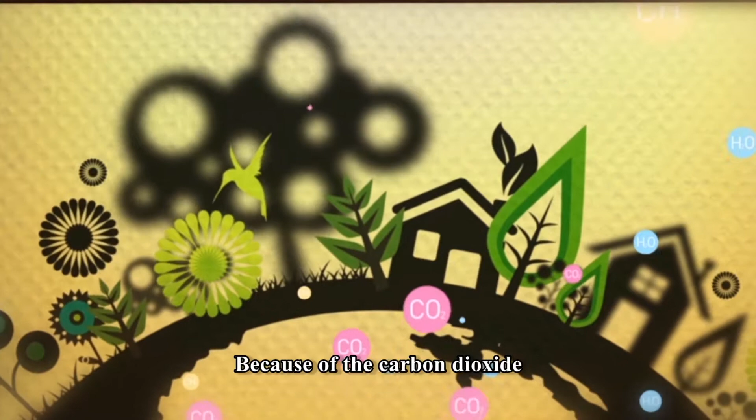This is because of the carbon dioxide and other greenhouse gases in the atmosphere. It's like the glass covering a greenhouse, which maintains the temperature and causes the greenhouse effect.

However, industrial activities consume extensive fossil fuels such as oil, coal and natural gas, resulting in excessive carbon dioxide. With excessive greenhouse gases, the greenhouse effect becomes too strong, causing global warming.

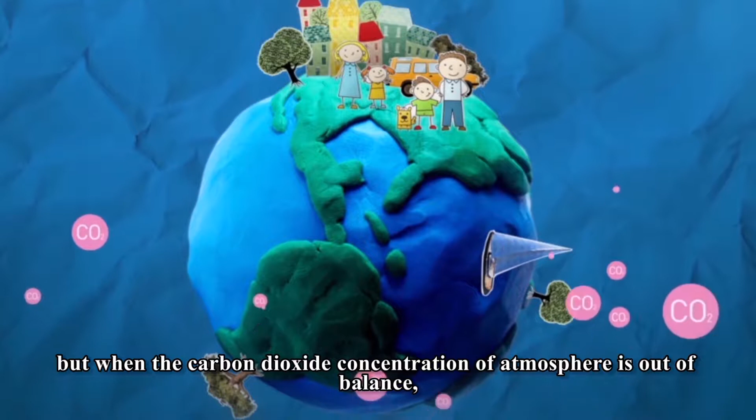Earth requires moderate amounts of carbon dioxide. But when the carbon dioxide concentration in the atmosphere is out of balance, it threatens the natural circulation of the Earth. Promoting comprehensive energy-saving measures to reduce carbon dioxide is the top priority.

There is a high-profile way to reduce carbon, which is carbon capture, storage and utilization, referred to as CCSU. There are many research teams devoting themselves to research and development on CCSU technology in Taiwan.

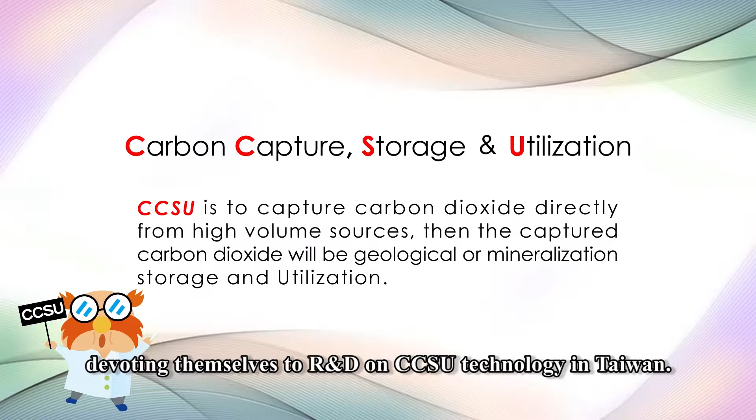The topic of post-combustion carbon capture is researched by Professor Zhang's team. They built a pilot plant in the Mailiao area of Formosa Petrochemical Corporation.

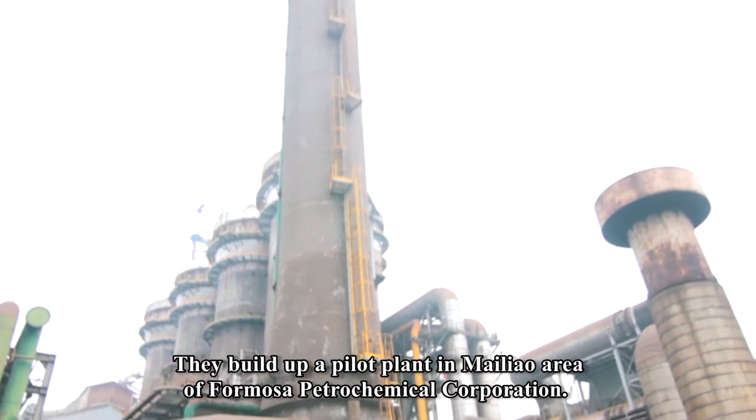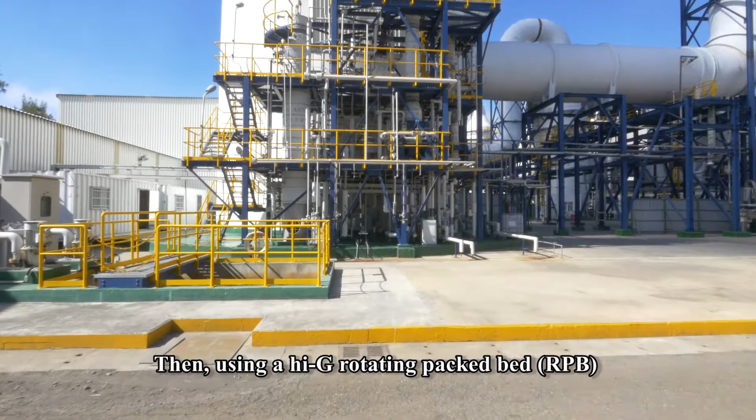First, the chemical absorption method absorbs carbon dioxide through a liquid absorbent. Then, using a hi-G rotating packed bed (RPB) can reduce two-thirds of the volume of the traditional carbon dioxide absorption tower, while also enhancing gas treating capacity.

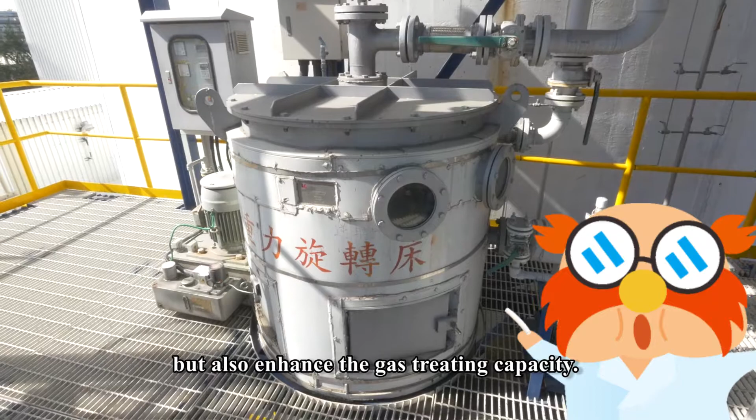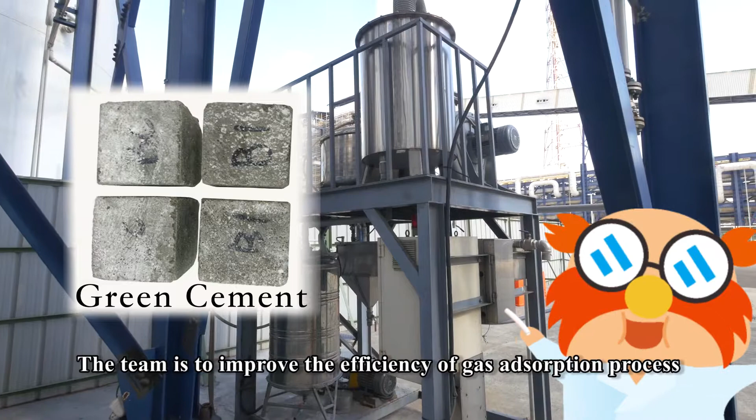The chemical absorption method uses alkaline waste as an adsorbent to adsorb carbon dioxide. The team aims to improve the efficiency of the gas adsorption process with a supergravity carbonation process, and the resulting carbonated converter slag can be made into green cement.

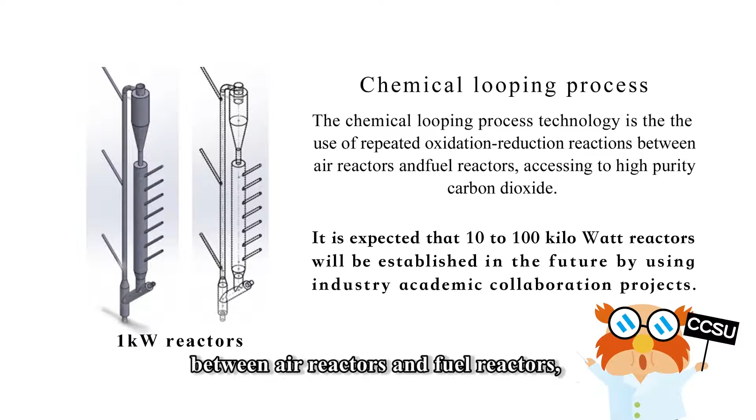The chemical looping process technology uses repeated oxidation-reduction reactions between air reactors and fuel reactors, accessing high purity carbon dioxide.

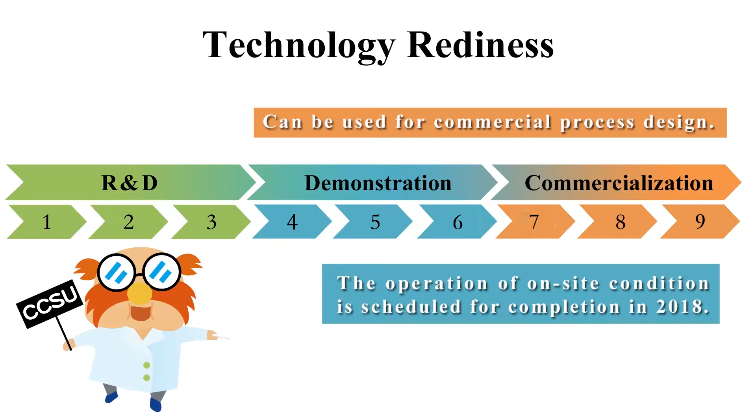The topic of pre-combustion carbon capture is researched by Professor Xiao's team.

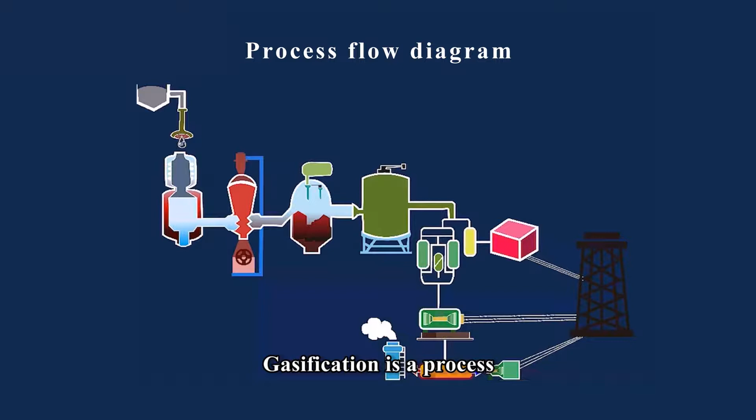Gasification is a process that converts coal or biomass materials into carbon monoxide and hydrogen-based syngas, and then a gas purification unit is used to separate the carbon dioxide.

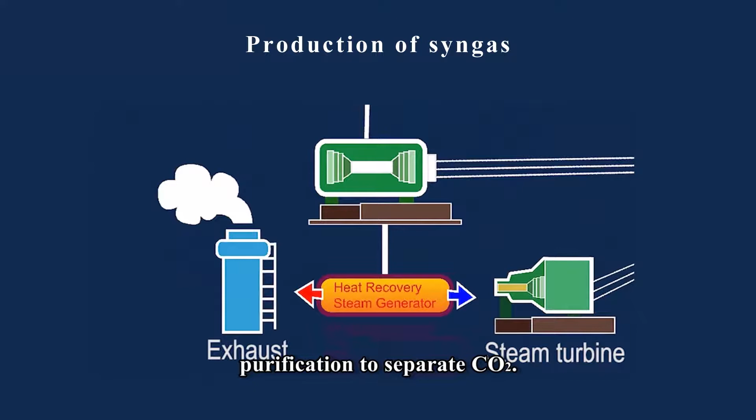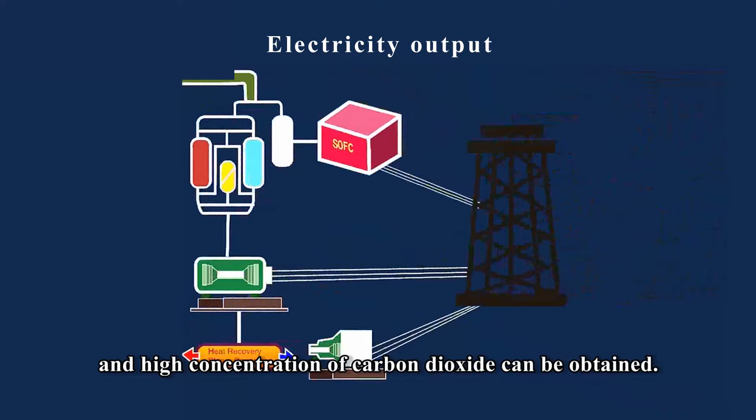It can increase power generation efficiency to 60%. Besides, the syngas produced can be applied for multiple purposes, and high concentration carbon dioxide can be obtained.

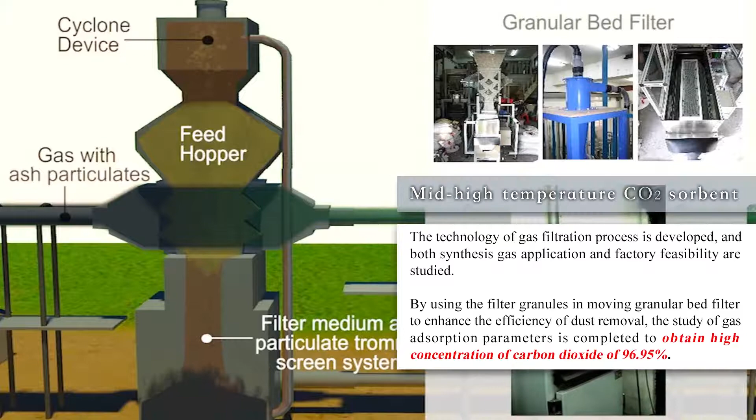At present, China Steel Corporation has been invited to cooperate on proceeding with assessment and factory construction. The solid absorbent pressure swing process has been applied at Taiwan Power Company.

In the future, the first 15 megawatt domestic commercial gasification equipment will be established in Taiwan, which can help domestic industrialization technology and internationalization.

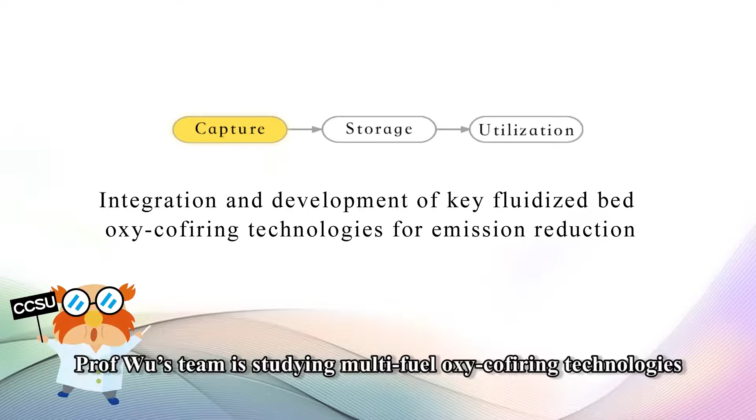Professor Wu's team is studying multi-fuel oxy-cofiring technologies for emissions reduction. In oxy-fuel combustion, combustion air is completely replaced with oxygen for carbon capture.

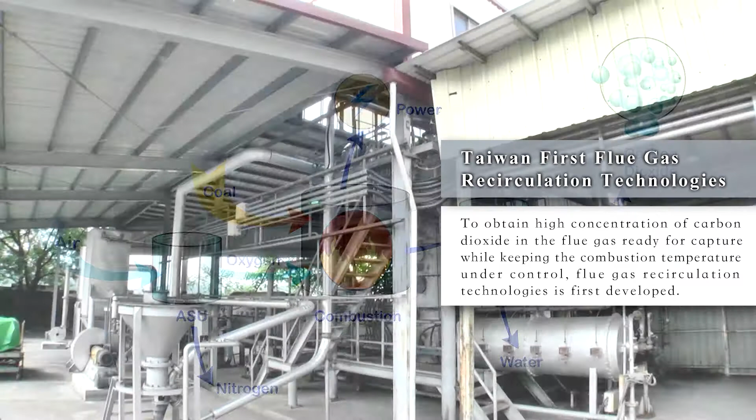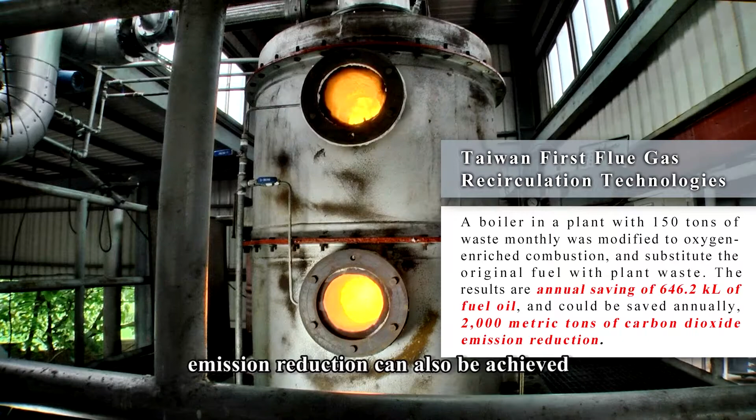Integration of oxy-firing of biomass and wastes through flue gas recirculation, and carbon fixation technology based on furnace slags, is currently being investigated to reduce carbon emissions directly. In addition, emission reduction can also be achieved through oxygen enrichment of combustion air.

Geological survey for carbon dioxide potential storage sites in central Taiwan is led by Professor Lin's team.

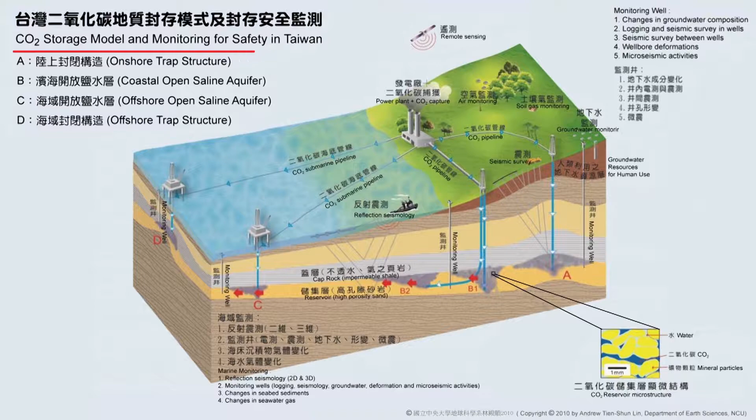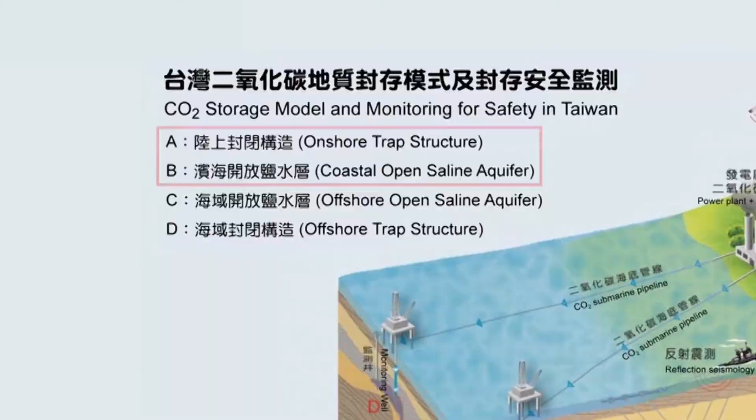Considering the West Plain of Taiwan is a densely populated area, most potential storage sites are proposed in depleted gas fields or coastal open saline aquifers. The storage type of coastal open saline aquifers is suitable for Taiwan, especially since most power plants are settled near the coast.

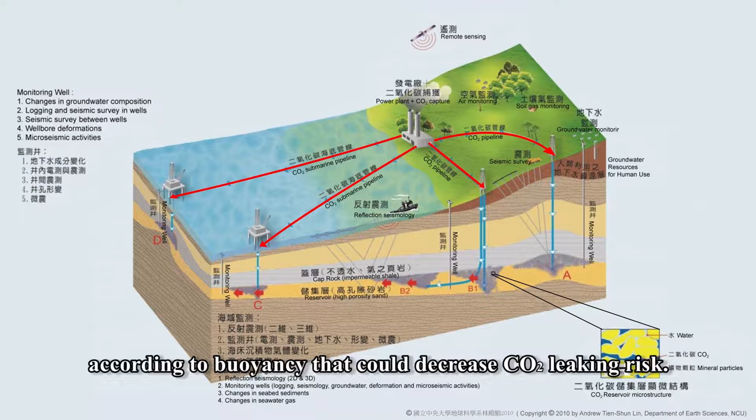Injected carbon dioxide in western Taiwan will migrate toward the Taiwan Strait according to buoyancy, which could decrease carbon dioxide leaking risk.

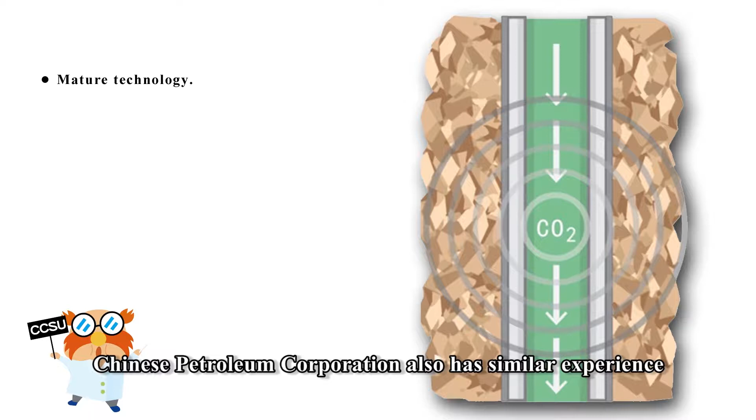Carbon dioxide injection into geological structures is a mature technology for petroleum. Chinese Petroleum Corporation also has similar experience storing natural gas underground that has safely passed through several big earthquakes.

Carbon dioxide will be injected at more than 800 meters depth, and injection pressure will be monitored and adjusted instantly to prevent microshakes. Right now, there have been no reports of large earthquakes in the world induced by carbon dioxide injection.

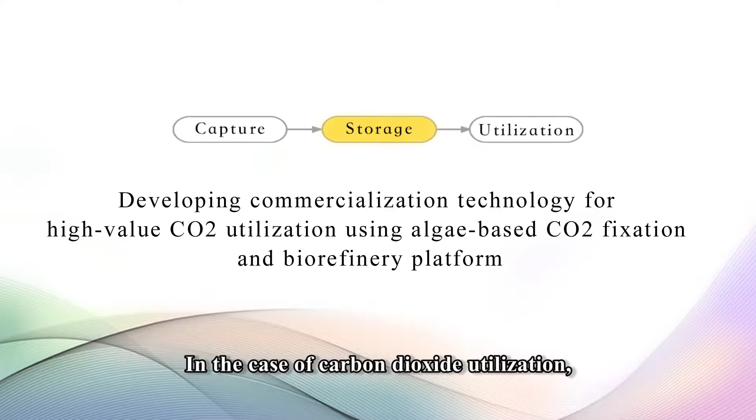In the case of carbon dioxide utilization, microalgae-based carbon reduction technology has been studied by Professor Zhan's team, with the largest microalgal carbon dioxide fixation cultivation plant in Taiwan.

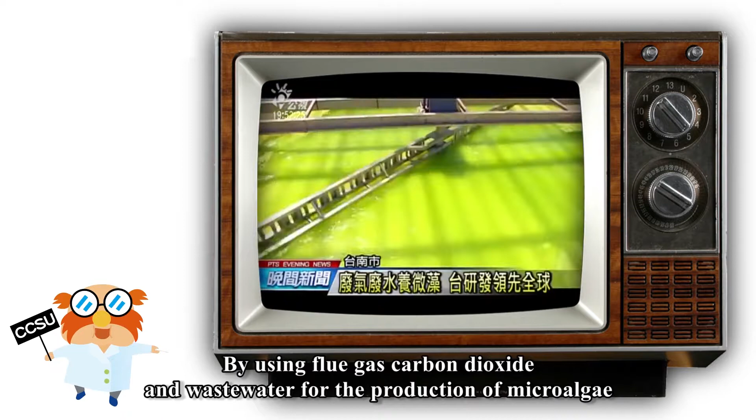By using flue gas carbon dioxide and wastewater for the production of microalgae, high-value algal biomass can be obtained, gaining media attention.

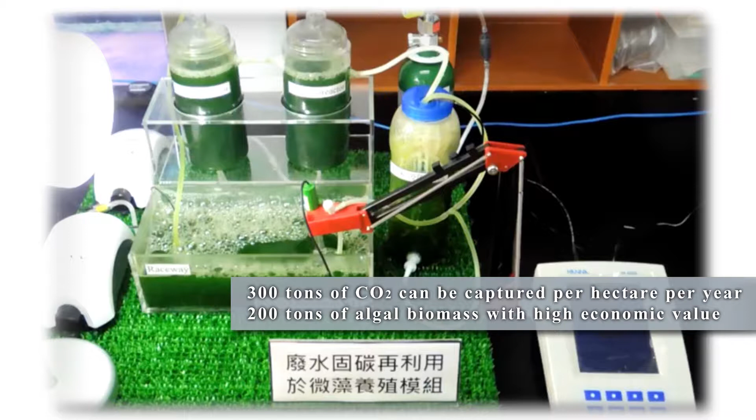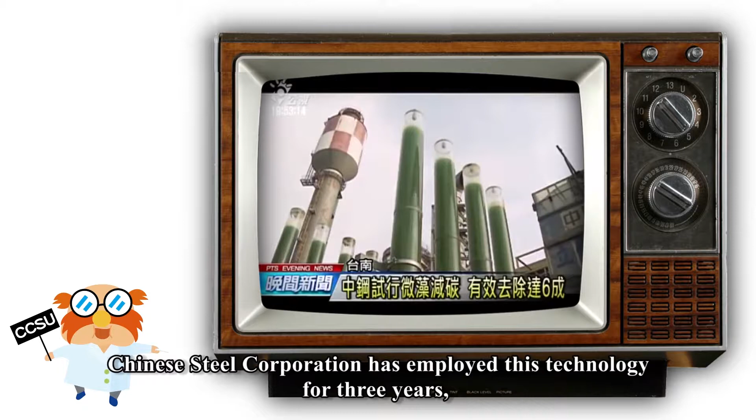The microalgae-based carbon reduction technology has matured into commercial applications. Chinese Steel Corporation has employed this technology for 3 years, achieving 60% flue gas carbon dioxide removal efficiency.

The microalgae biomass produced can be used to produce biodiesel, lutein, and fish and shrimp feed.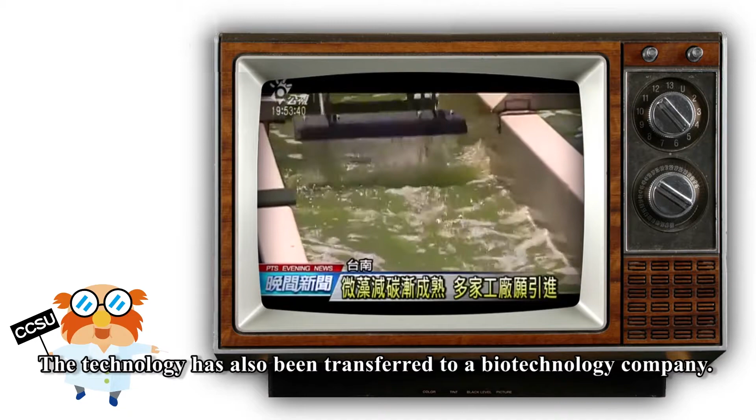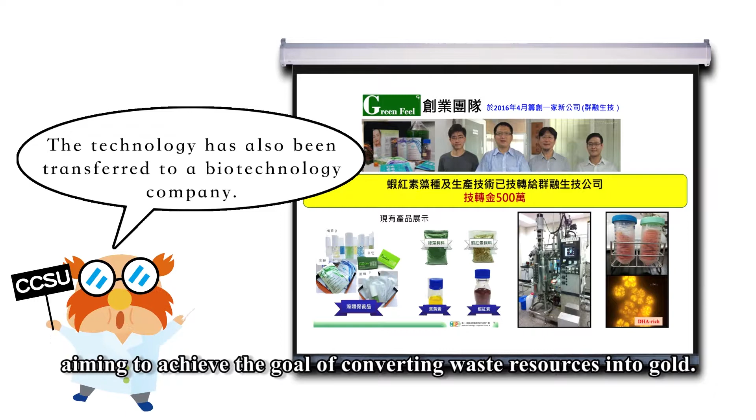The technology has also been transferred to a biotechnology company. The team has also started a new venture company for commercializing their microalgae-based carbon dioxide or waste utilization technology, aiming to achieve the goal of converting waste resources into gold.

In addition, Professor Yu's team and China Steel Corporation cooperated on carbon reduction research. At first, a novel carbonation system of basic oxygen furnace slags, or BOF slags, was constructed in the steelmaking plant.

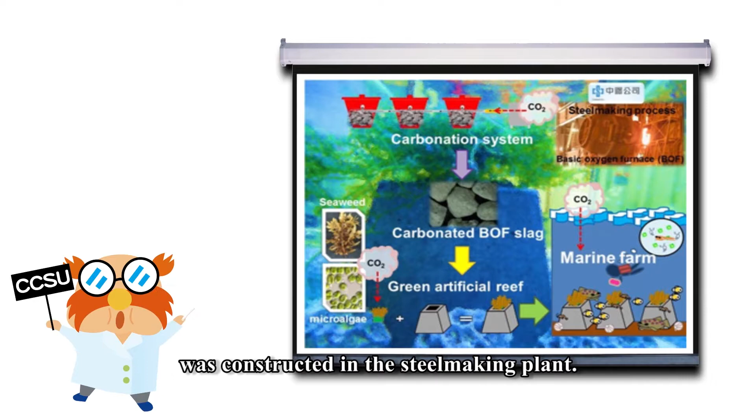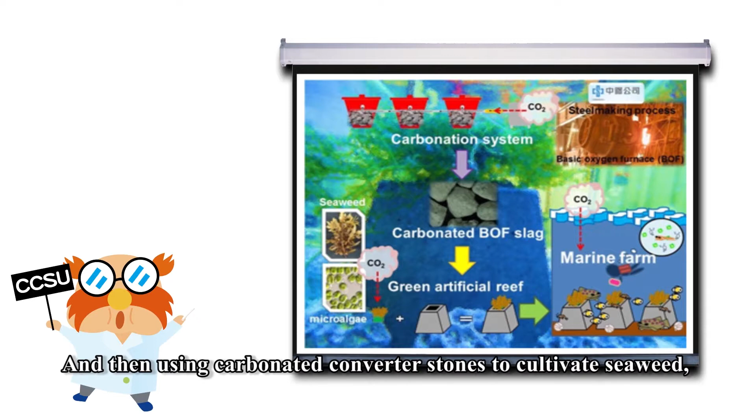The BOF slags were used to absorb carbon dioxide in the flue gas of hot blast stoves, forming carbonated BOF slags. Then, using carbonated converter slags to cultivate seaweed, a biocarbonization study was carried out.

Results showed that the carbonated BOF slags could promote the growth of algae and enhance the carbon fixation rate.

The recent study used carbonated BOF slags to create concrete artificial reefs and proceeded with on-site field experiments for a marine ranch.

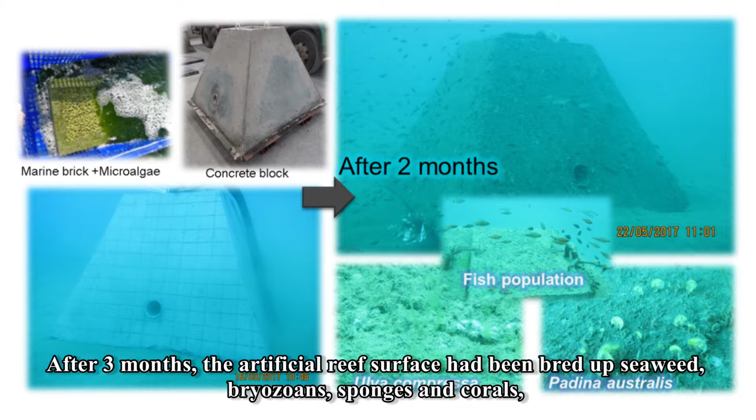After 3 months, the artificial reef surface had bred seaweed, bryozoans, sponges and corals, and fishes were gathering around the reefs.

It was confirmed that these artificial reefs had positive benefits in reducing carbon and increasing marine resources.

At present, there is considerable research and potential development for CCSU in Taiwan. During commercialization, these technologies are applied intensively with large carbon emission factories, such as establishing demonstration plants with China Steel Corporation, Formosa Petrochemical Corporation, and other companies.

Demonstration plants have been established with China Steel Corporation, Formosa Petrochemical Corporation, and other companies, and the relevant key technologies have been transferred, forming joint development agreements.

In the future, development of CCSU technology and its industrialization will continue in order to achieve carbon dioxide reduction.